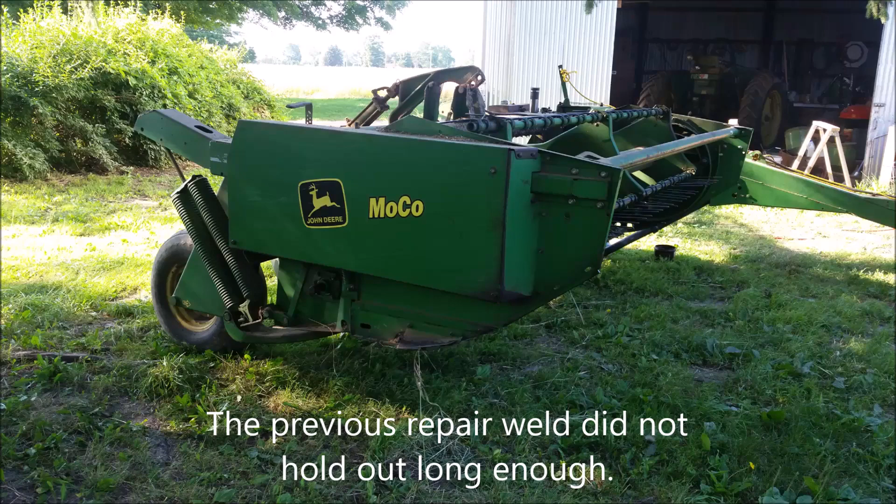So we're back at square one here with the gearbox, and the weld didn't hold. He was apparently worried about damaging these seals before because it was the weekend and we weren't able to get parts. So now we have new seals on hand, and he has popped this one out.

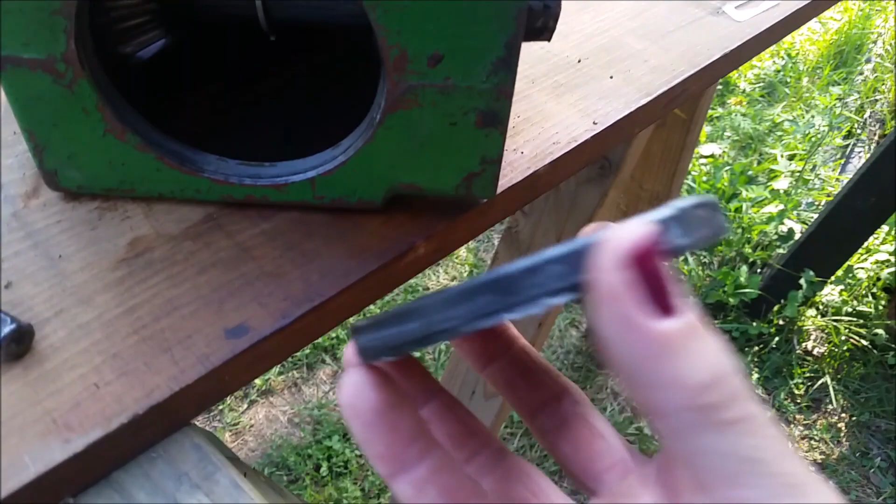So have your parts before you tear it apart, because this cracked just a little bit. It's kind of like a rubber coated cap. I don't know if it'll make a difference or not, but we have a backup now.

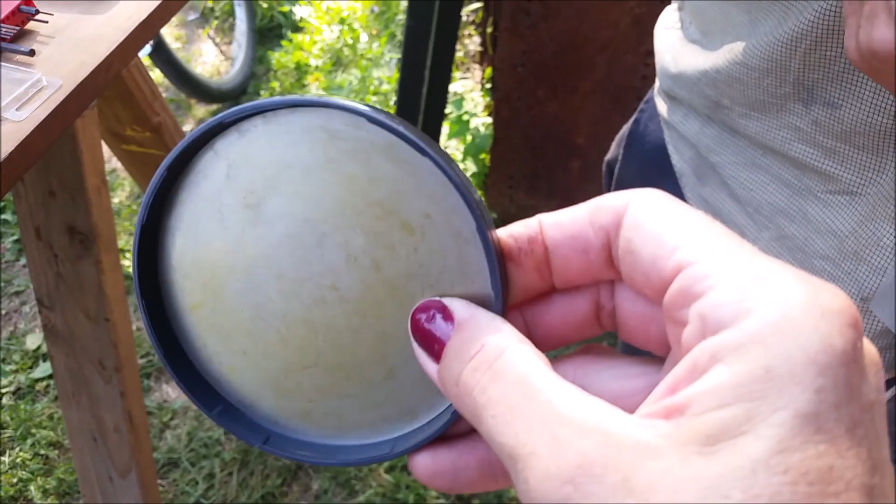Oh yeah, the last one in the country. So the John Deere 720 Haybine, if you're needing parts for that - this is from Atlanta, sitting in a dealership there. It was the last one, sitting on a shelf all this time.

So he's got this retainer clip moved, and he's trying to see what's going on with it. Now you can see it, to be able to slip this whole shaft out instead of just welding it, if it's possible. We have to take it out because this goes inside of this one. We couldn't weld it properly because we would have melted and caught this seal on fire and ruined it.

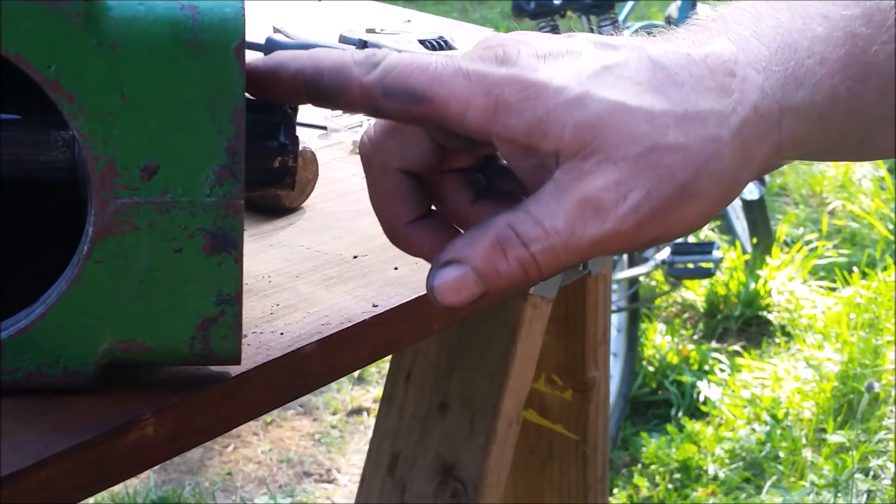Yeah, but now this is available. This is $8. Okay, so we got that.

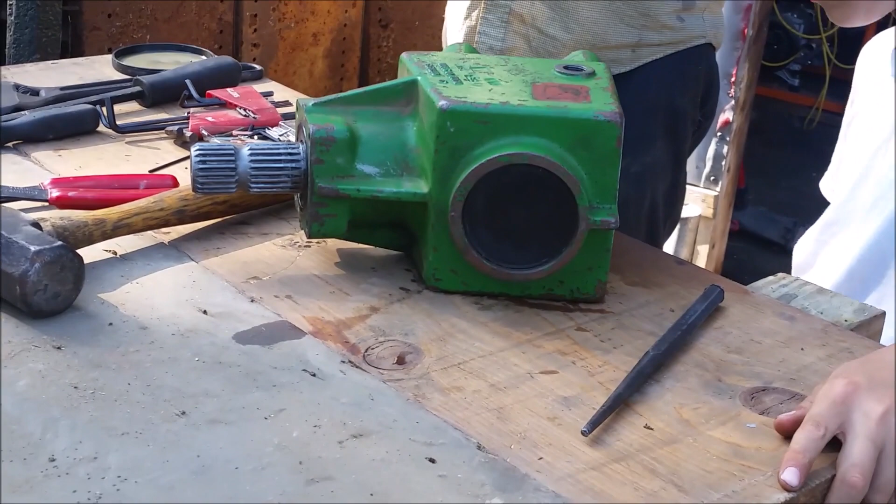So now we'll just take the shaft out now that we know we have a seal, and we can weld it for real, because that only went a few acres since it was so shallow. I kept welding it here and there, couldn't get it hot, and I didn't wreck the seal, but it didn't matter because the weld wasn't good enough. It was able to get us going to get 315 bales, but now we got to get serious about it and get our hay going and up in the loft.

So this is what's going on this weekend.

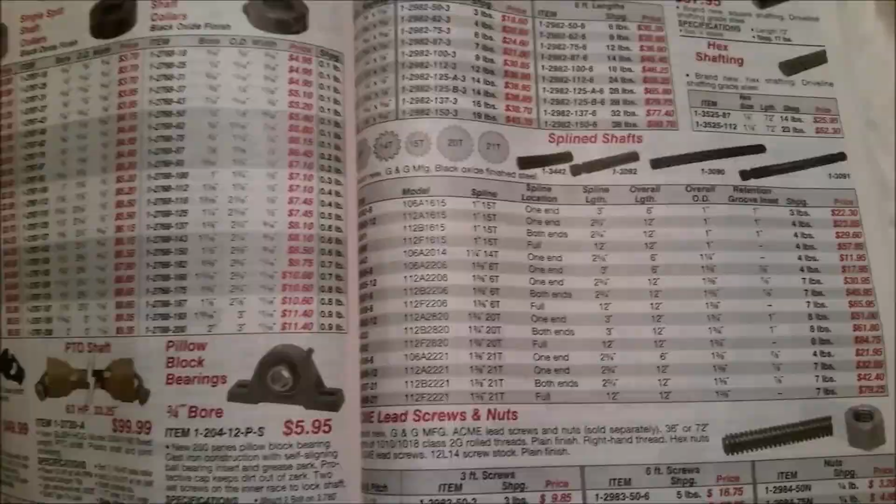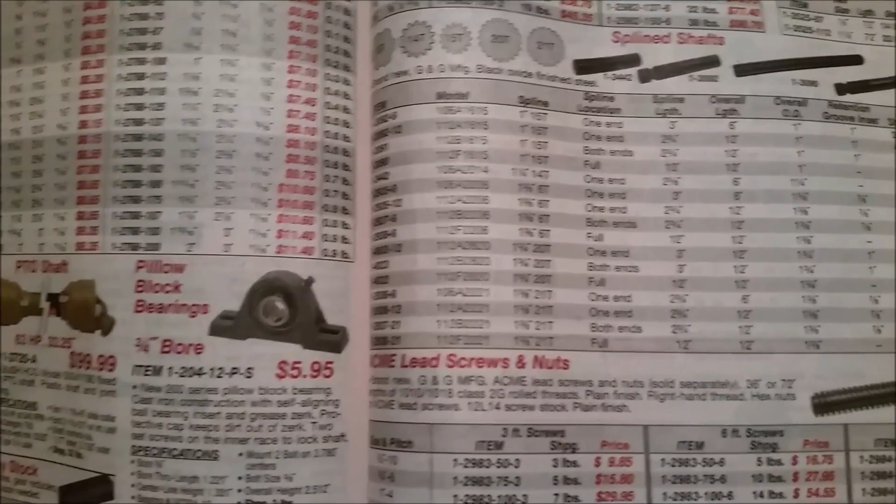So here is where we really lucked out. We found this company online, Surplus Center, and we were able to find the spline shaft. They're not referring to them as PTOs in this catalog, but this is page 139. I know PTO shaft problems come up with farming all the time, so I wanted to put this in the video because these are not items in stock at places like Family Farm and Home or Tractor Supply, and their prices for the most part are in line with or better than anything we've found there. This spline was $23.85.

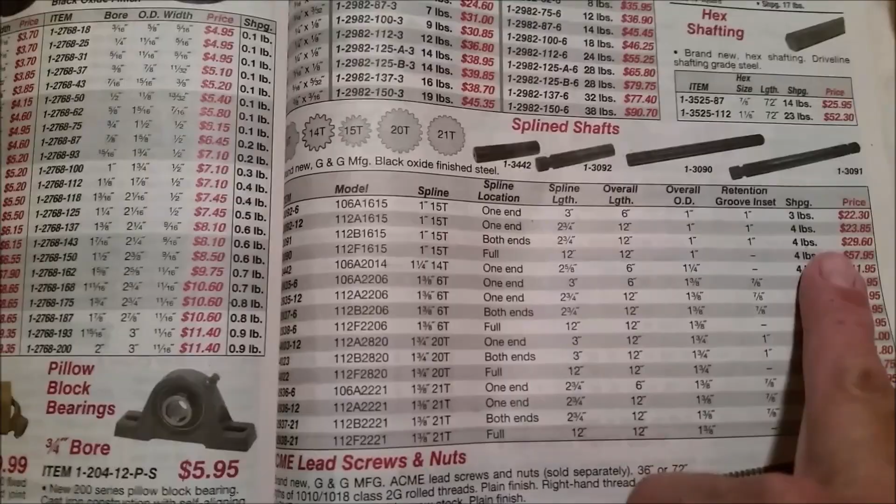We ordered two to make sure that we had one on hand. This gearbox is obsolete as far as John Deere goes, and it was over $400 when it was available through them.

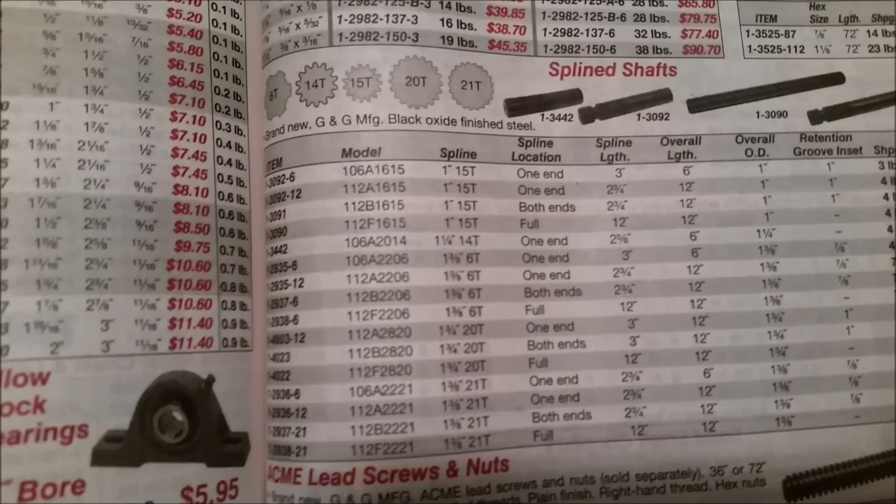Okay, so what do you got? We had to buy a blank, they call it splined shafting. We found it in Nebraska. This isn't available, hasn't been for a while for this gearbox. Everything on this mower was made in Spain, and they're discontinued, most of it. So that shaft was about like that long.

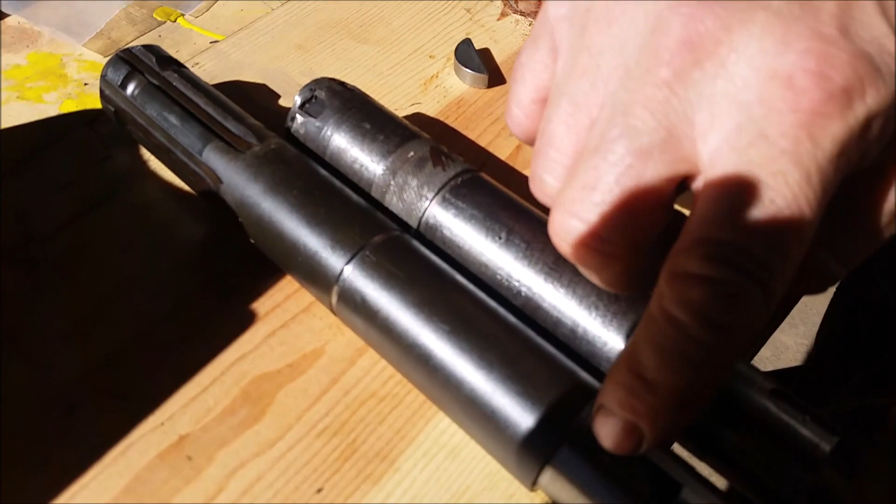So we had to have this little clip right here, the alignment clip for the whole job, just based on that right there. And it had to have a keyway in it to hold this gear. The original shaft had a little key slot here, but for no reason, because this is the bearing for it and it doesn't take one. So anyway, he didn't have to put that in the new one.

Okay, cut the end off. These are two different diameters - this one's a little bit smaller. You can see that little step right there. And this should get it taken care of.

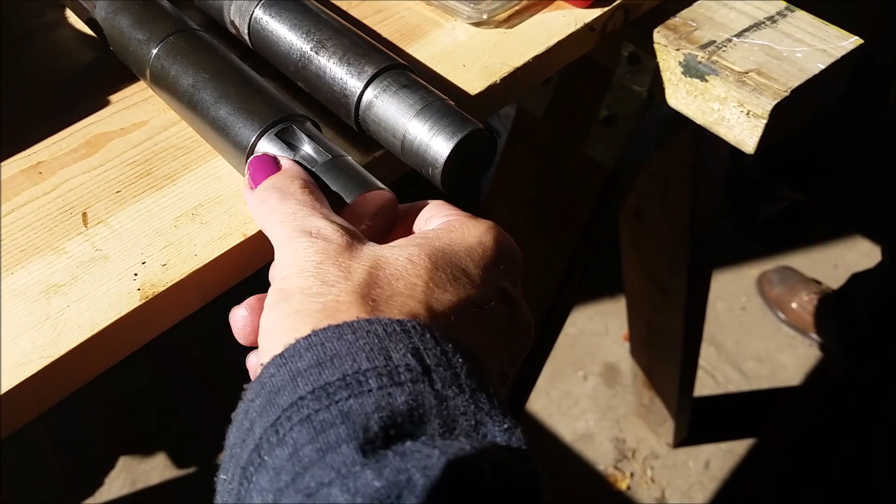So because this is such a hard ordeal and all homemade, we bought two of them. We had two of them done identical, see? So if it goes bad again, we've already got it. Yep, so that should take care of this.

And you were able to get these? This is the old one. Okay, but you found those at Menards and Tractor Supply, right? This is just a Woodruff key, that's common, and that's what holds the gear from spinning.

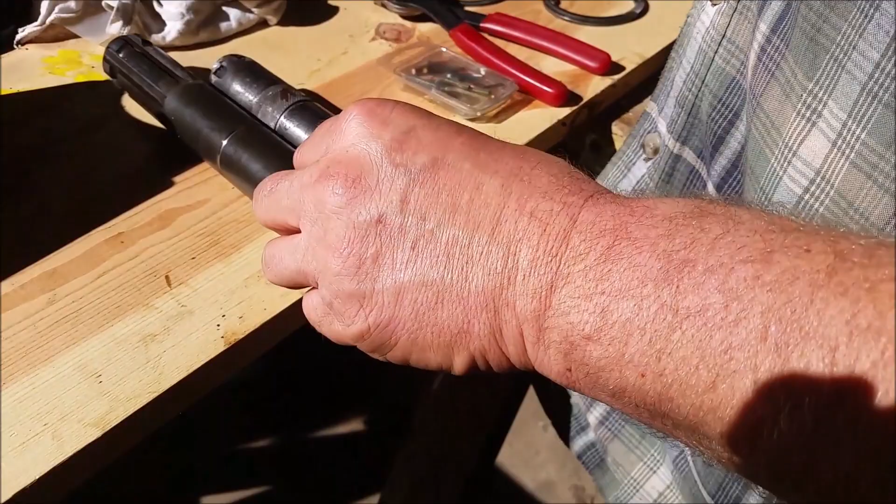Okay, so these are a bit of a press fit. So we'll get it all put back together, get it on the mower, and this should be what ended up happening was - this is kind of a wear point. This gearbox wobbles on some rubber bushings, which is odd. And this is just, it's a 21 spline 1000 shaft going in for your input, and a 540 6 spline shaft coming out. It's common stuff, but it's weird. It's an overdrive gearbox, it's 7.5 to 1.

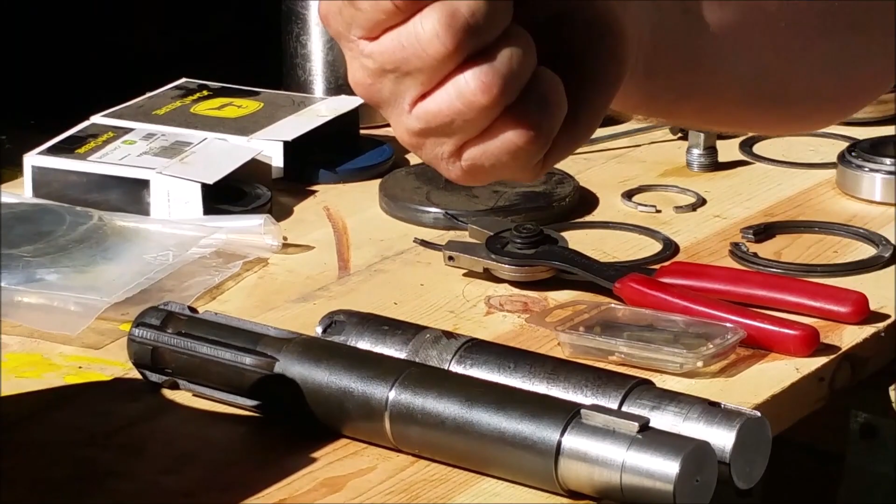Eventually what happened is they wore this spline off. It goes directly into your slip clutch on the mower. They wore it off, so they ran some crappy beads of weld down each one, shoved it back together, and sold it. So we inherited the problem. It sheared off, and we found all those long little beads of weld in there, kind of all in one piece. We saved them. That's what they did, because they couldn't buy the shaft either.

Then we cut it and welded a new adapter on the end. It didn't really work. We took a 540 shaft from Tractor Supply and left the gearbox altogether. The reason is it happened on the weekend, and the seal that holds the oil in is right about here. We knew we couldn't get the seal on the weekend. If I welded it correctly, it would have melted the seal and just lost all the oil, and you couldn't use it anyway. So we welded it real cold and just barely tack welded it, and that actually got a few acres, then it sheared right off.

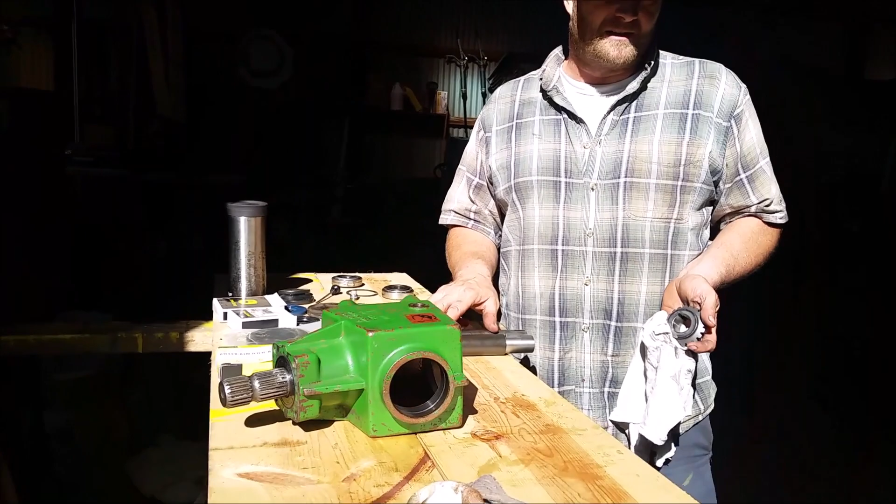So we knew we had to, when we had the time, fix it right. Now it's fixed right. We did the waterway in two different days around, or one day around the outer edge.

Before it basically broke, if we would have had the seal available - which this was special order, everything for this mower is discontinued. This is all old stock stuff sitting on a shelf. These access covers came from like Georgia and Canada and all these far off places. It's not available. If you would have had the seal available, you could have really welded this right and beat it out and got it to hold. It'd be hard to get it aligned good enough to last, but you could have done better than what we did. So we just used another mower and did what we could and waited to get this all set up like we are now.

It's just slow going because it's 7 feet, where this is 12 or 14? 9'9", I think. Oh, the swather was longer. But it's fast because it has a reel. And they're driving them fast. They really cut fast. They don't cut as fast as - what do you call the new ones? Haybine. No, discbine. They're not nearly as fast as a discbine, but they're fast.

So we have - yesterday was dry, or today? Today's the first dry day. It quit raining last night. Okay, so it's supposed to be dry for 3 days. Well, it said, I think, 30 and 50% chance later in the week. So the one I got on said 10. This is Sunday. It quit raining last night, so I went to work. It was too wet to drive in. Yeah, to get this fixed. And it says 10% from Sunday through Thursday, so I think we might have 5 days to do.

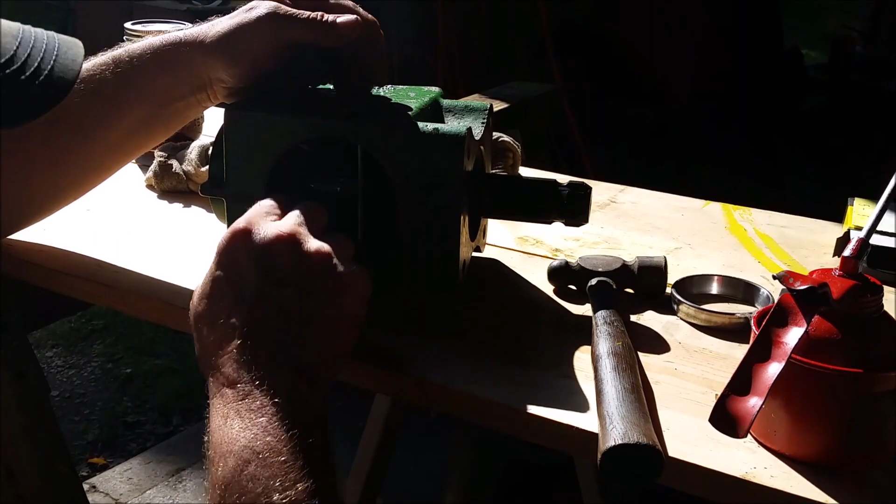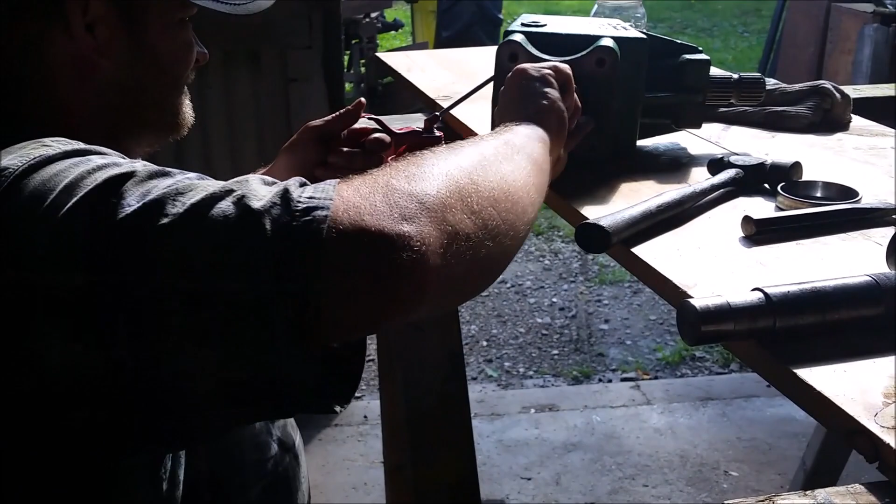Hi there. Hi. I don't know where it is. No. No. Oh.

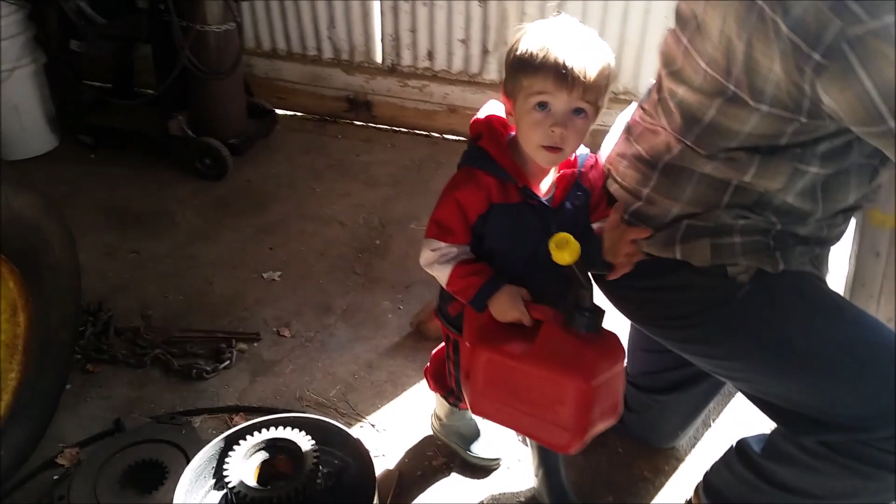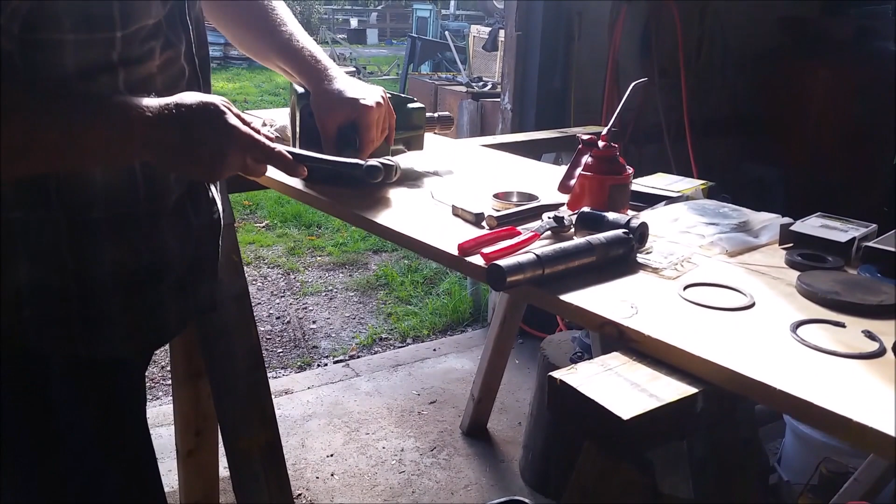You're smart, give it a shake. Shake. Is that your fuel tank? No, okay, mine, yeah, it's yours. This one's yours. Nope. There.

That was running rough. So as it turns out, there were 2 different thicknesses of these thrust washers, and I had the wrong one in here, and it was putting the gear too close to the other gear, so I switched it, and it was smooth as silk.

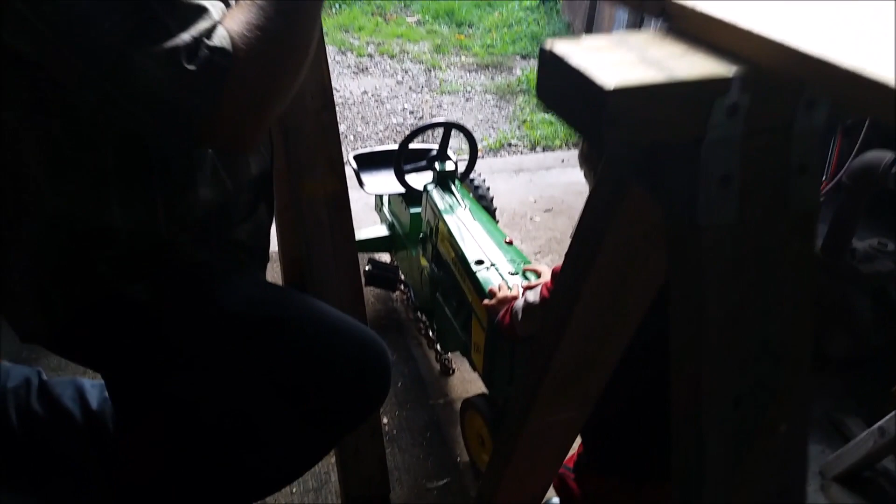He's filling his tractor with fuel. Yeah, I got it. Look, now he's taking it back out.

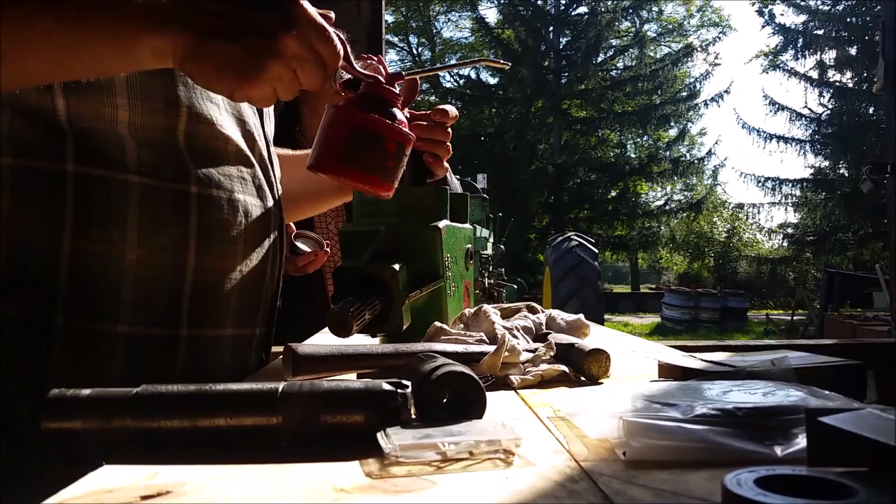Where? Inside. Is this your fuel line? Yep. There, perfect. We're doing good. Okay, yep.

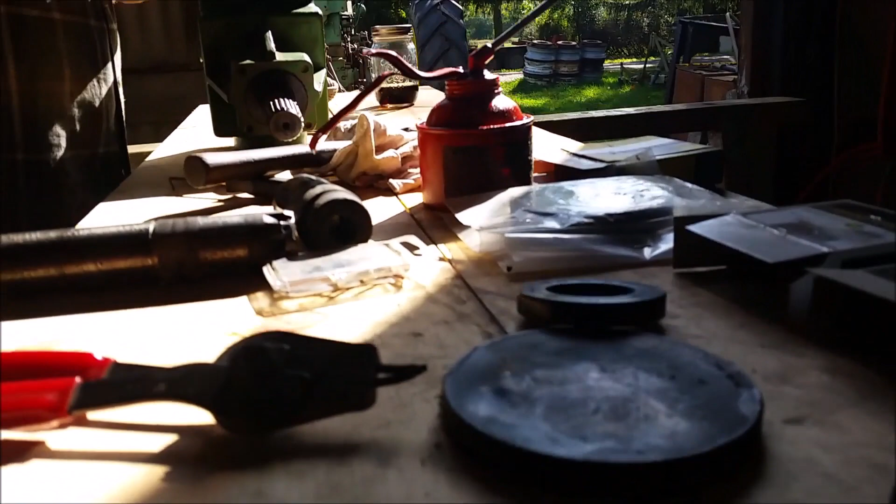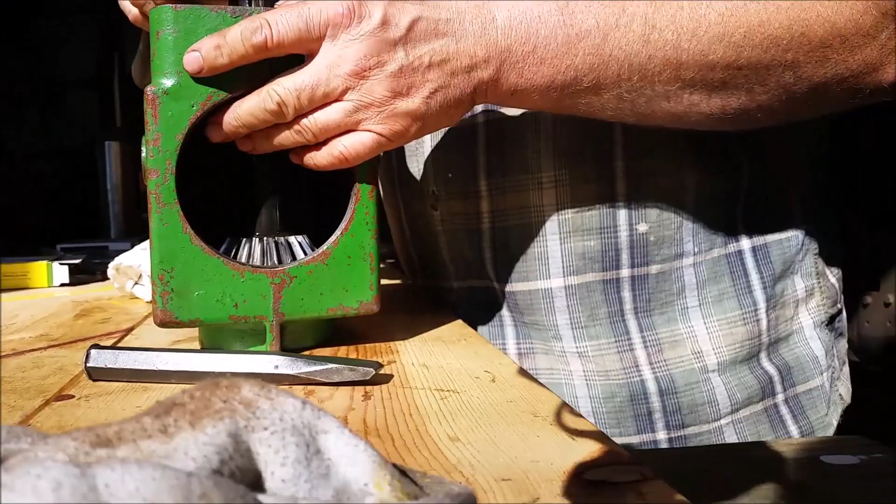So this seal is this one. Let me see it before you. So, that little rubber lip is what holds the oil in. No, not that one, no, you can't have that one. Nope, not this one, this one.

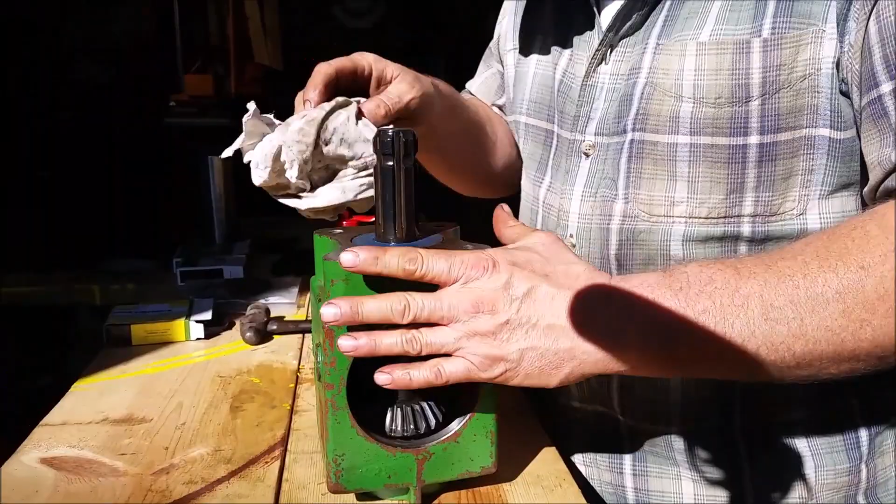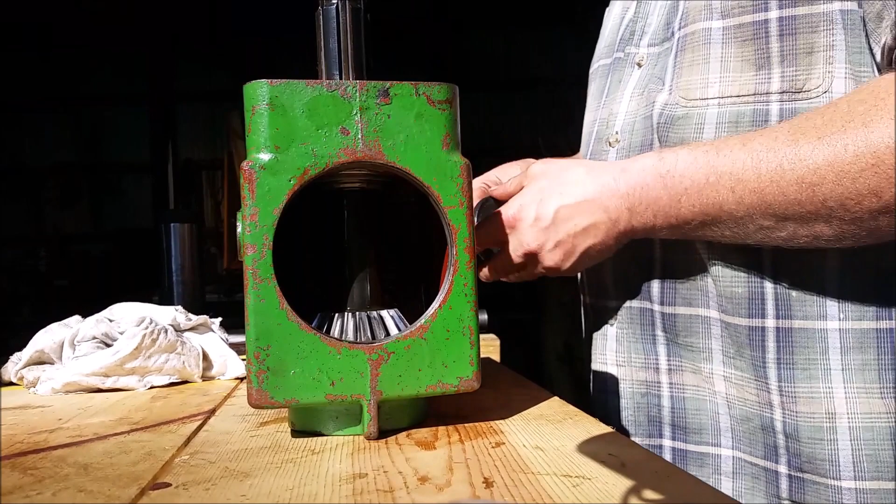Oh, look at that. Is that a type of plastic or rubber? It's rubber, they have a spring in them. Here's the old one - there's a spring in there that holds the rubber tight against it, and that's what keeps it in tension. As it wears, the spring just keeps moving it in. This did not get ruined when we pulled everything apart. Several parts didn't, so we're in good shape if this fails again.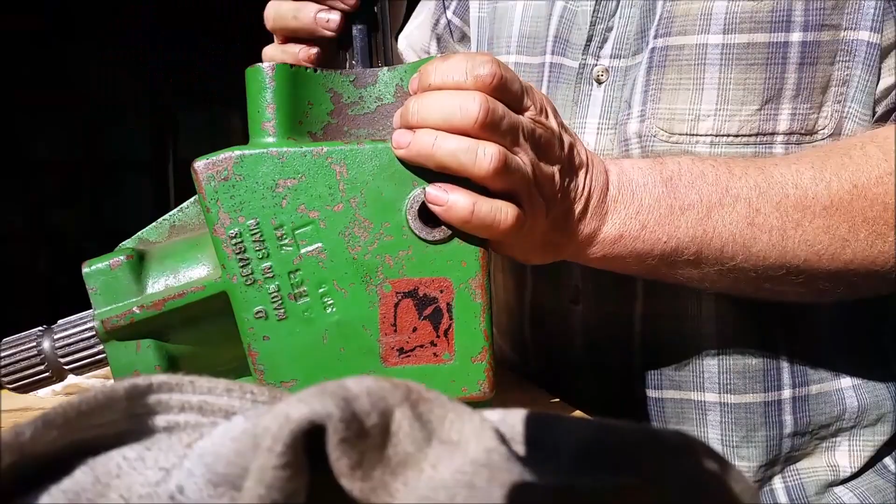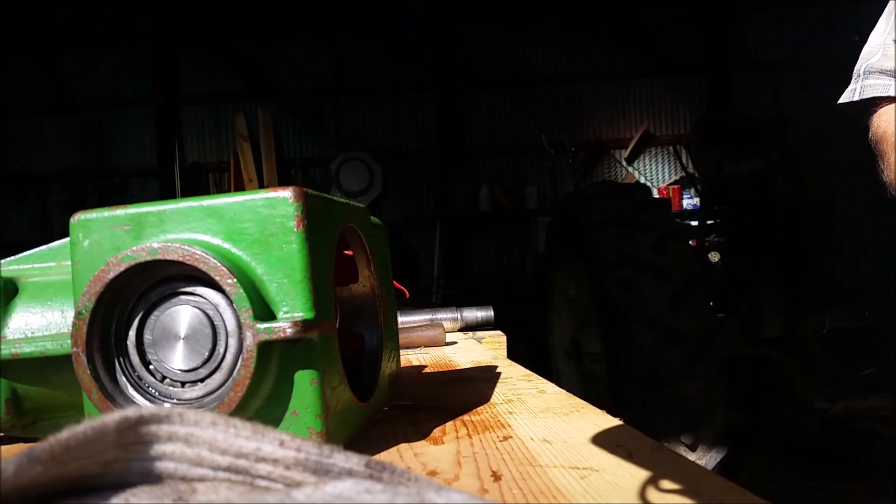Perfect, sounds good. So put these covers in - simple enough repair, just took forever to get the right part. Here's a new cap, here's your access cap.

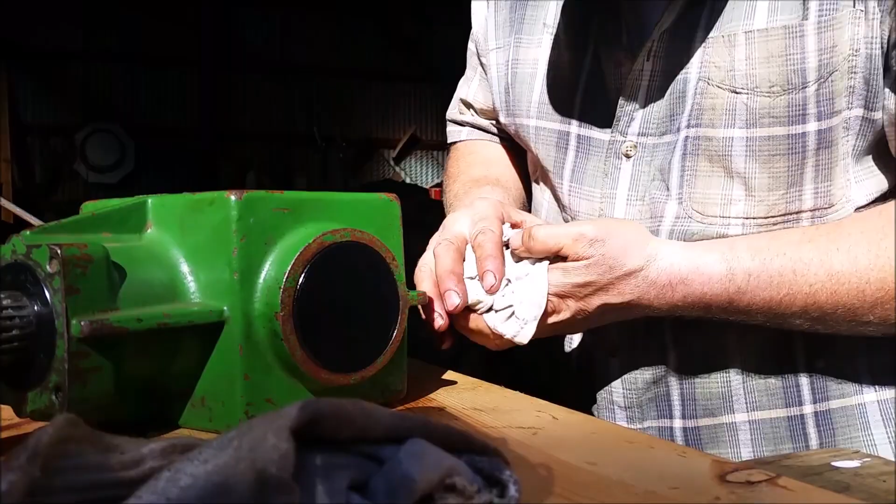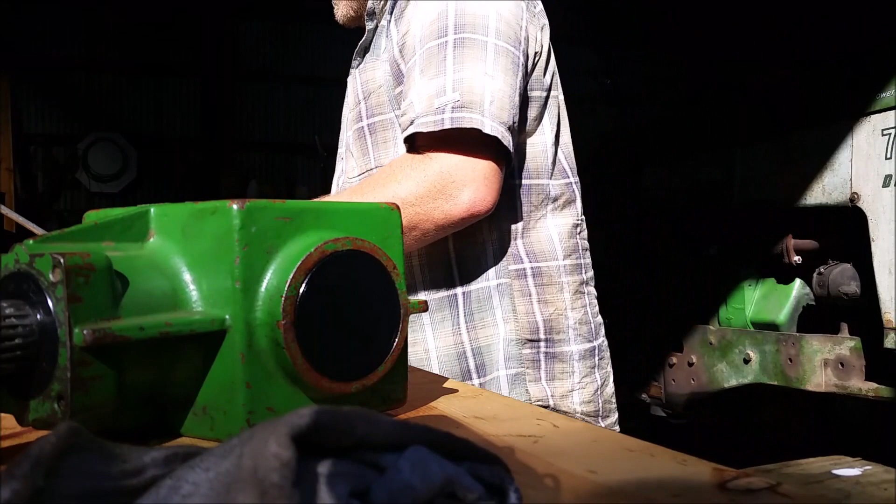Okay, talk about gear oil - I'm just going to put 80W90 in it. There's a bucket of it right down here. Sometimes all these rubber parts and seals aren't made for the synthetics. I don't know, this machine was built before synthetic oils got really popular, so I'm going to put normal conventional 80/90 in it, because I think that's probably what it had. It'll be fine.

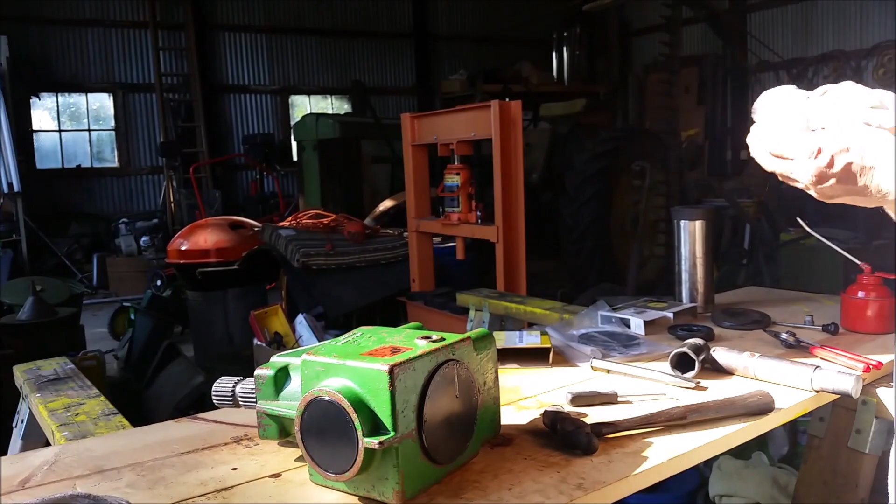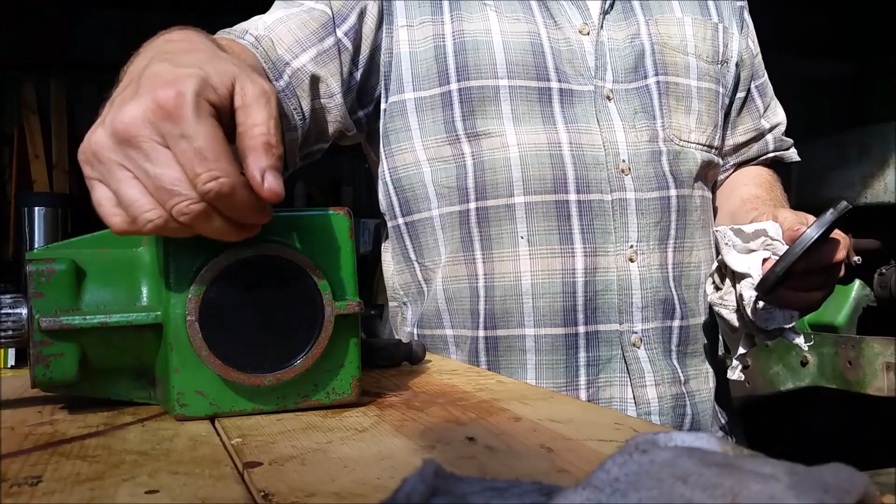These are the last two new ones in the world - we own them. One came from some other country and one came from Georgia or something, and that's it, that's just the way it goes. Here's the one we took out - you kind of mar it up a little, but it's usable. This one, I reached in here with a special tool and popped it out, but you do kind of wreck it. So if anybody else has to do what we just did, it might be a decent idea to grind this down and weld a little C or U shape so you can come up to that next time and just pop it out with a pry bar. We have extras so I didn't mess with it right now, but that could really save you, because these parts are going away. The 710, 720 John Deere MOCO, not good for parts anymore.

So it's all going to be homemade, anything that happens. So the good deal you find somewhere, it might be because it's broke, badly patched. This was a very poor repair and then pawned off on someone. And how would you know? But now we've owned one and it's happened, so we won't buy any more of these. They cut good though.

Well, same thing with the swather, you know - until we start having that.

Wow, we're doing a nice repair here again. Keep it going, that's what you do.

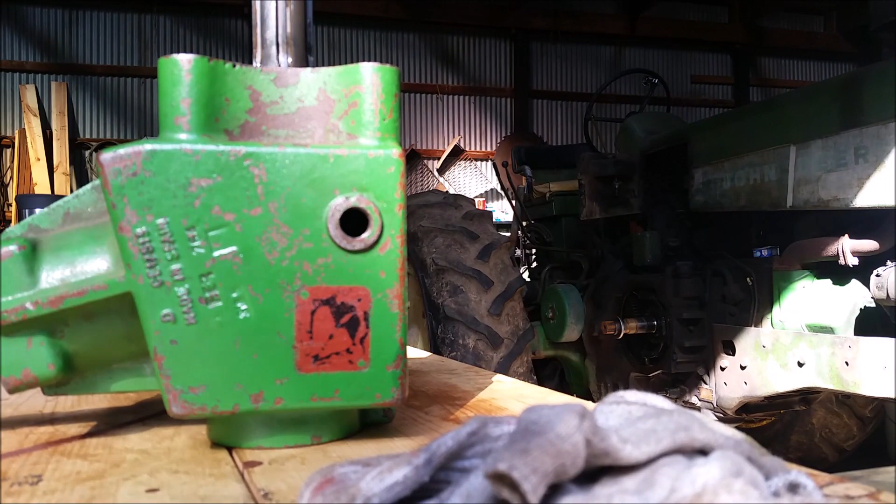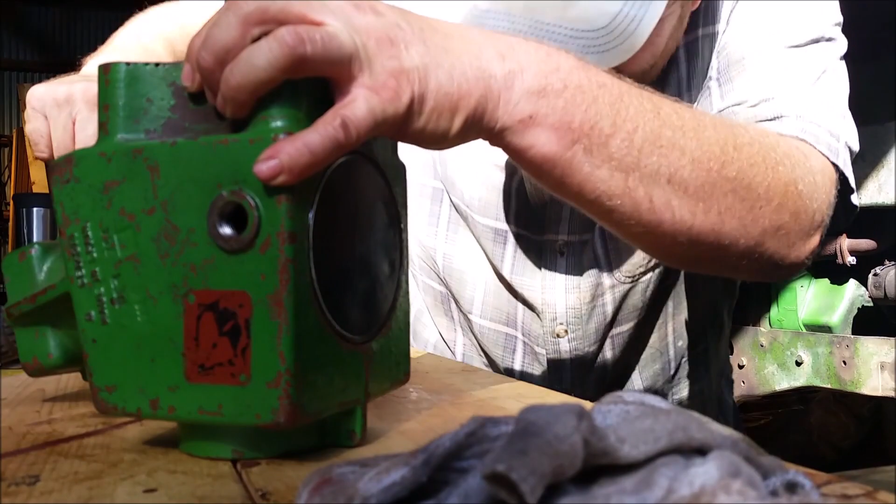So should we dig this input shaft seal out and replace it, because that's the one that was leaking - that actually had a leak. What do you think, pull her out of there. As long as the PTO input shaft is okay. I think so too.

It is right here - 35, 62, 10.

Nice repairs, yeah? Of course. Making videos for people, are ya? That's right, are ya?

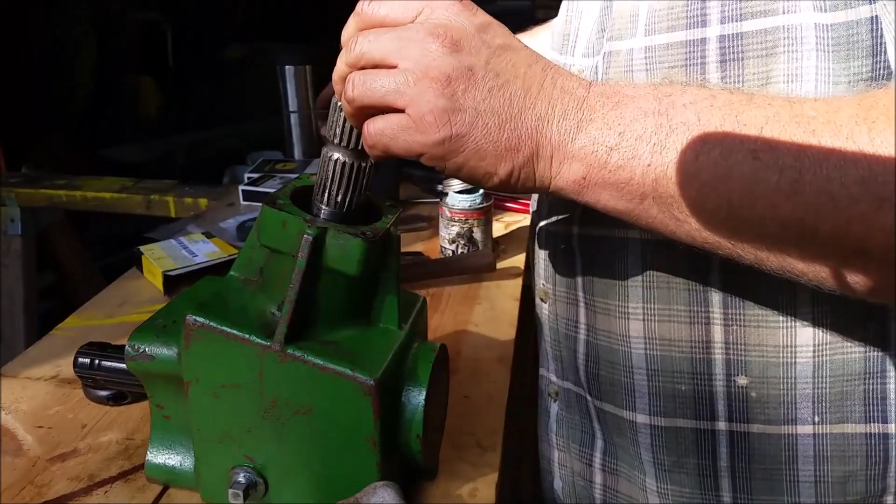So does that get a lubrication right there? Yep, same idea, pre-oil it. It's getting loose.

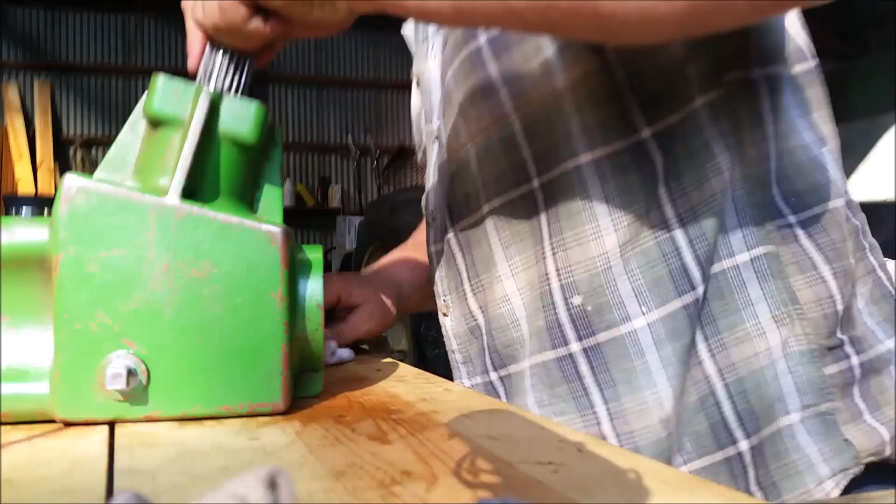So here we're back out at the machine. Hopefully this new microphone I got helps filter some of the wind out, because I know outdoor filming can be terrible.

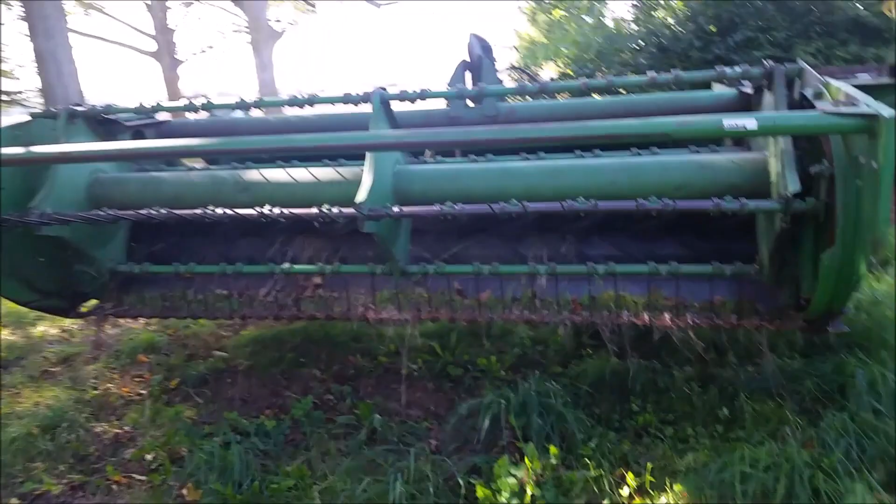How big is this? Guy, how big is this?

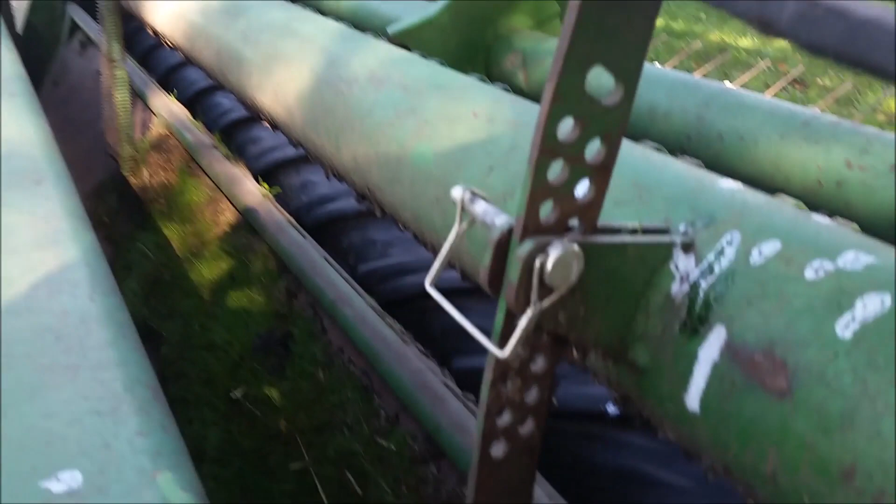Oh, we got grass growing up in it everywhere, sprouts. Probably wouldn't hurt to power wash this stuff at the end of the season, huh? Oh for sure, power wash all that dust off. There's absolutely grass seed up in there, got mud on it from another time it was used. I'm seeing all this grass growing up in here and moss, so that'll be my job - get this all cleaned off. Just terrible, who are these people anyway?

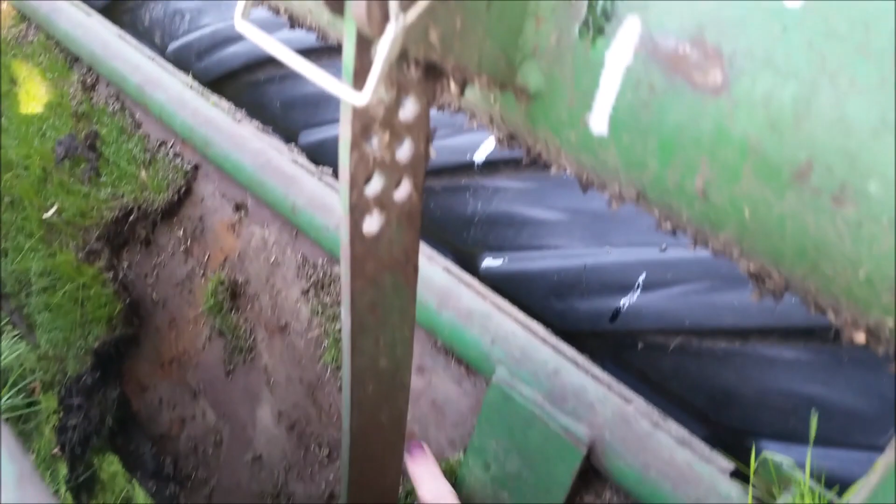Bow season started, so they're out there shooting. Yep. Why? Tell me the correlation there. Doesn't matter.

Couldn't have given a power washer to a better person, huh? You? Yeah. So the side of the house needs it again - about once a year.

Total mat of grass growing up here.

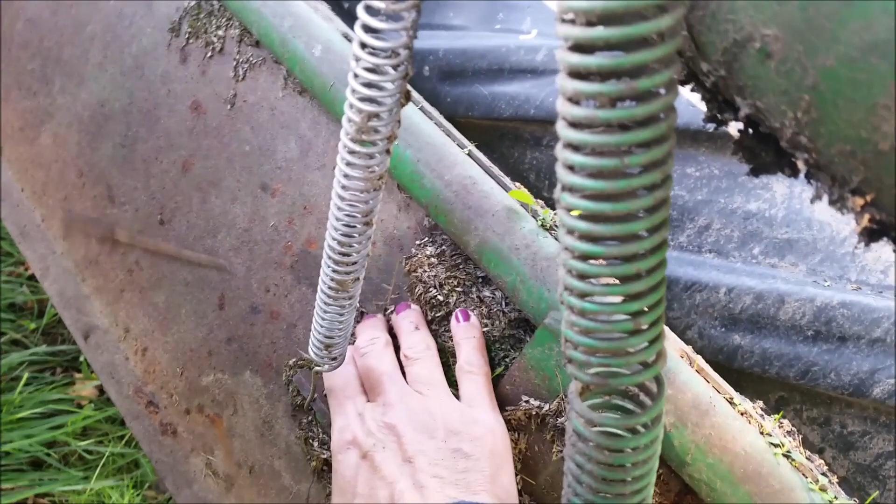Alright, I guess I should have realized this needed power washing before. And? Huh? And? Well, this isn't stuff I'm used to doing. You don't have to, and then put it back to work, really. Well, I like things nice.

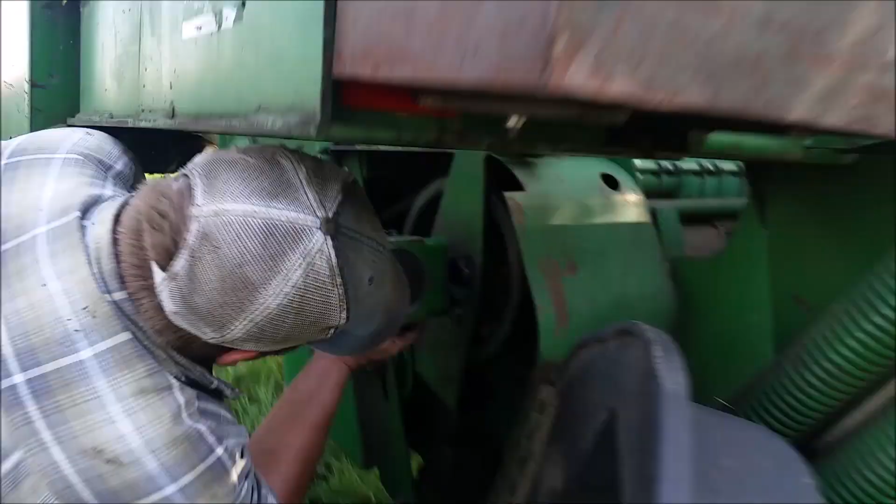Got it cleaned up? It seems to have helped. Every time I hit it, it goes. Had some old debris from old shafts being stuck. Now it's kind of stuck, but if I hit it one more time, I bet it'll come loose.

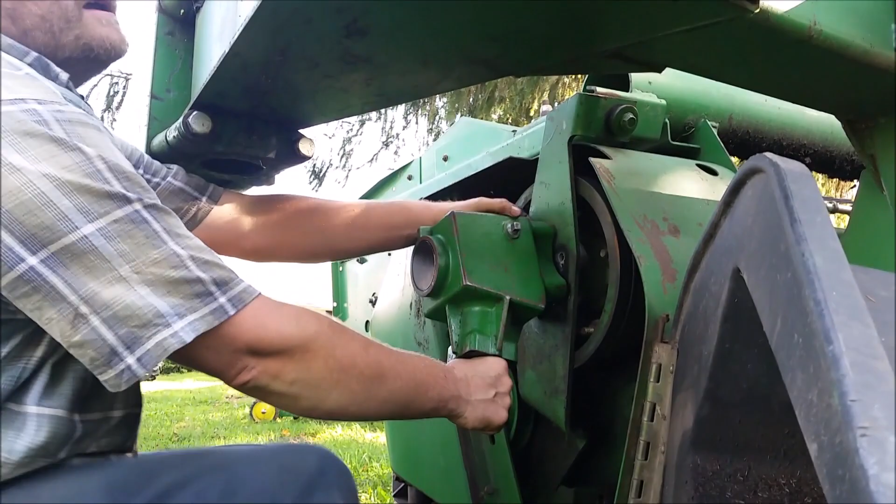Well, can you see up in there with a flashlight or anything? Oh yeah. Every time you hit it, it gets a little better.

Their little deal where they welded up the spline and just tried to get it by for a while left little bits of stuff in there. I just took a screwdriver and my fingers and stuff and tried to get it cleaned out, and now you can see it's okay. It's right about there.

Now it's acting a little dry and sticky. I'll oil it.

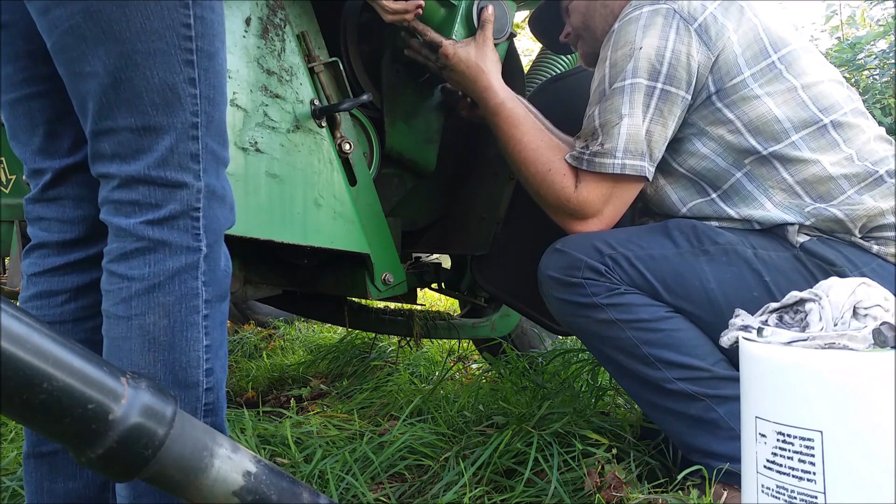See my bum. No, you walk right up in here. Walk right around the hitch. This bracket, work with that bracket a little bit. Okay, don't cut my fingers off. Lift it up. Lift it. Lift it.

Okay, so he's got it back together and he thinks it's gonna hold. You gonna try it out today? Yeah, looks like a good repair.

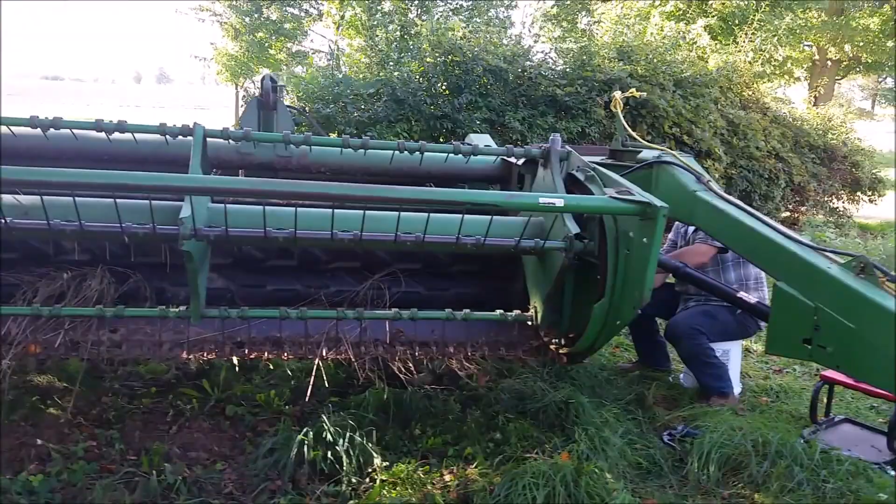I went through and I got all the growing grass out of it. I told him that I guess from now on the job for me is to give it a quick bath, power washing when he's done using it in between during the season, and to give it a thorough bath at the end of the season, because I can see how that dirt packed in there is drawing moisture and letting water sit in there and grow the grass seed that has collected.

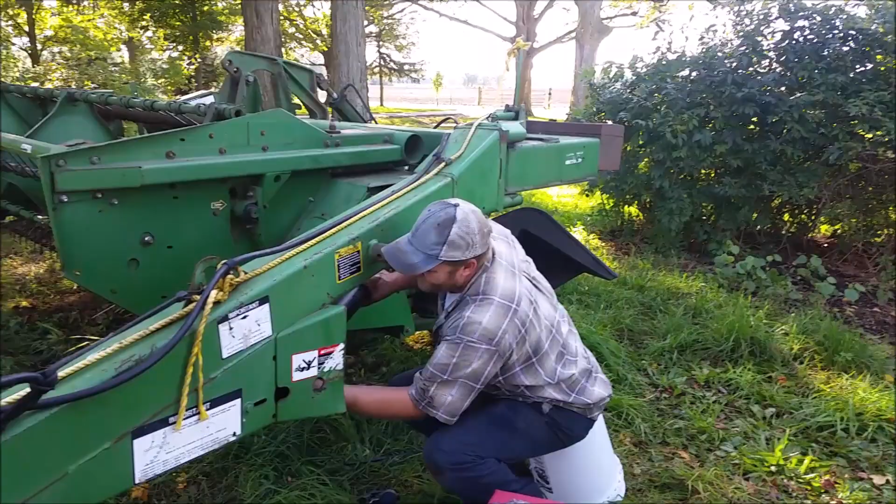So we're gonna hopefully get several more hundred bales up. I was starting to say about first cuttings and second cuttings. So how many bales would you say that we've collected for the year? Normally we keep track, but we didn't do much keeping track this year. I don't know. Well, we had the straw and the hay, so the loft is really full, but we haven't filled up that area above the pig pen yet. We've got almost a full storage trailer to fill, so there's plenty of room for more, and I've still got a little room left on the main floor.

Whether or not we use the dry floor for hay storage is always kind of a, you know, whether we want to do it or have tractors parked in or equipment. It just kind of depends. We've got a janky barn door to kind of work on and kind of make that decision.

But a lot of people who did go ahead with the second cutting, when others were cutting, we noticed that there was only a couple of inches of growth from the time that we were doing a first cutting next to a second cutting in the same field. So it really wasn't worth going out. There was no tonnage for that, so it was better off to kind of wait. If we get kind of a warm spell still, it could grow some more.

We did notice where we have done a first cutting later in the season that it is ready for a second cutting now. So we're gonna go through, cut as much as we can, and get some money in the barn.

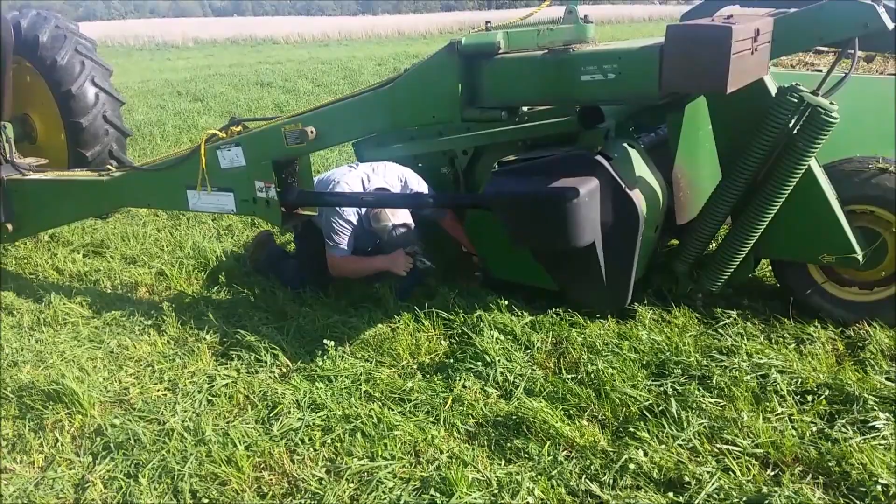When you paint it, it's just like a mirror. So it'll need 2 coats. It's real thin paint.

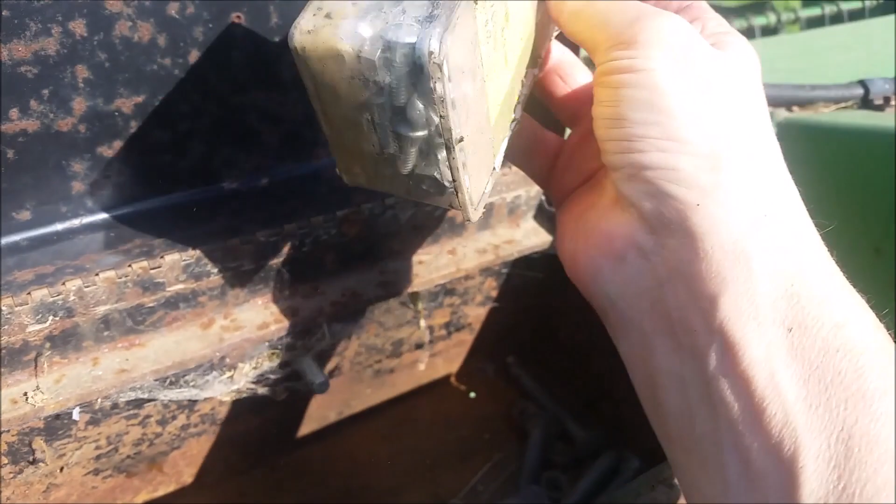I think I'd like to take his toolbox off and paint it for him, because it tends to get rusty and get in worse shape, but I realize it's just a toolbox. He carries some teeth sections in here for that, some bolts for it, a few more bolts. Got everything he needs there.

Oh yeah, it was black. Well, I think it should be painted green. Where this was parked in our yard and I had been cleaning it off, there was grass growing from the seed blowing off of it just from the wind, and all these different crevices had grass growing on them. So definitely a good idea to at least blow it off when you're not using it, because like this little circle here—there's another one on this side—it was just packed full of seed and dust, and of course it got wet from sitting out, and I actually had grass growing in all these sections. So blow it off at the end of the day at the very least.

The sun goes away and then the sun comes out and you're warm. Yep. Okay. You want to keep that with you? You got a tool thing? Oh, you got a toolbox.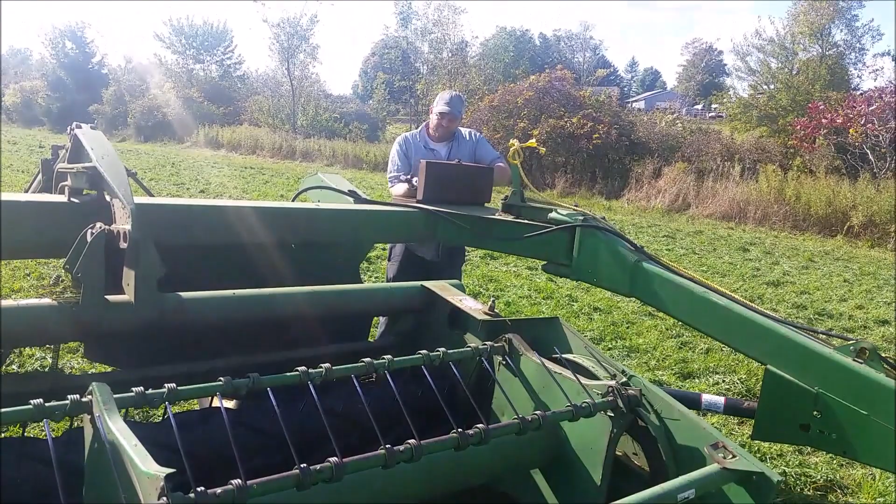So he says it's not going to be real heavy, not a lot of tonnage. That's fine, it's still getting cut. It needs to be cut. We're not going to waste it. I think we're going to be real busy here for the next bit. From now until Halloween, this is our hay season since we're getting such a late go at it.